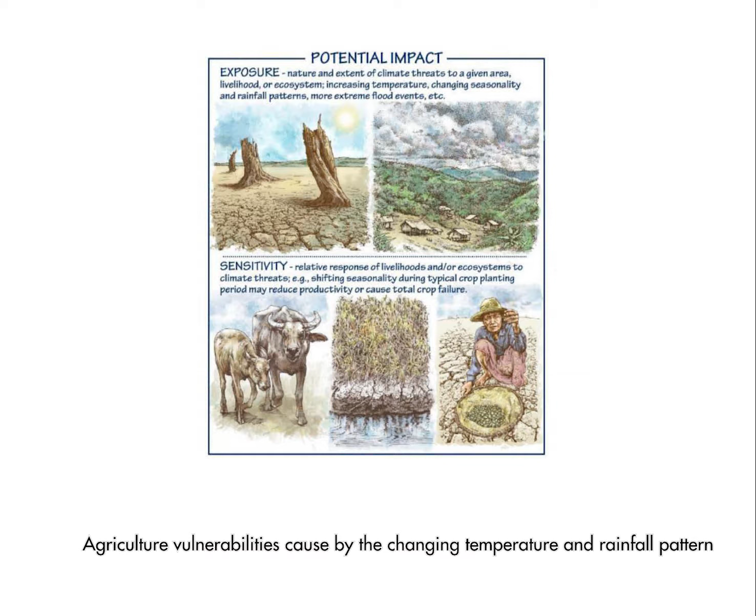Climate change has the potential to increase poverty. Agricultural vulnerabilities caused by the changing temperature and rainfall pattern are expected to play a significant role in pushing people back into poverty. In Cambodia, the monsoon rainy season runs from May to October. There is a higher risk of flooding in the 4 months from July to October.

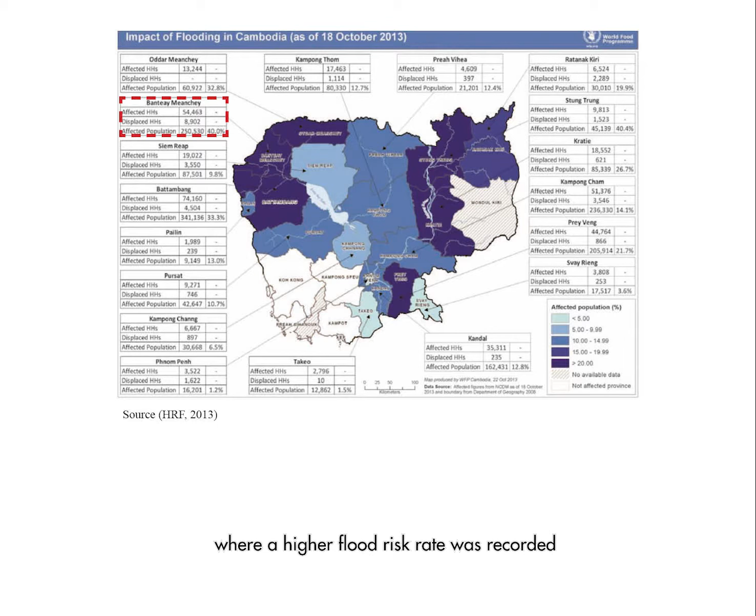Serei Saophoan is a city belonging to Banteay Meanchey province, where a higher flood risk rate was recorded. A large-scale flooding in 2013 revealed Cambodia's vulnerability to flood with a high proportion of damages. The flood map in 2013 highlights the flooded areas in the south and east of Serei Saophoan. Taking flood issues as the starting point, adaptive capacities need to be found through analysis.

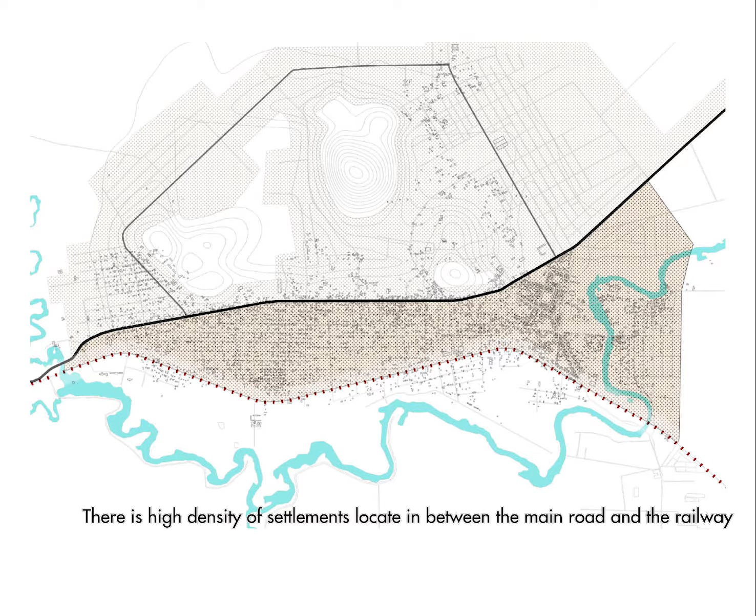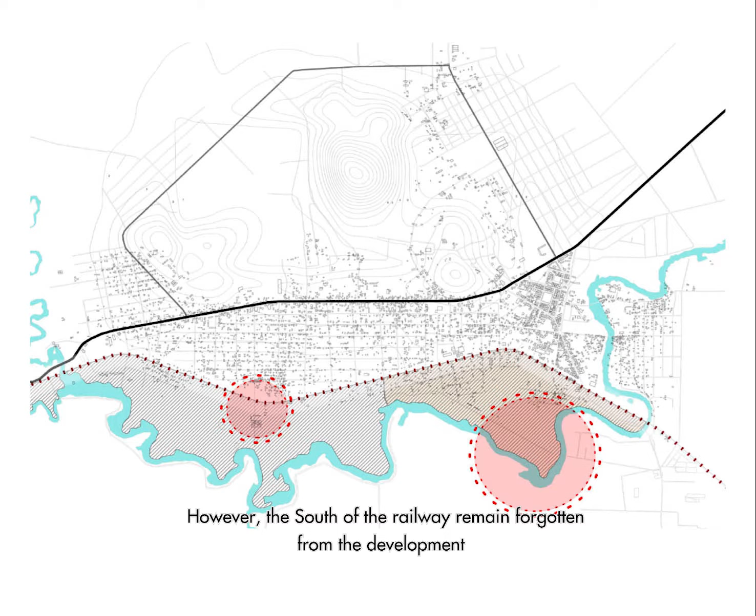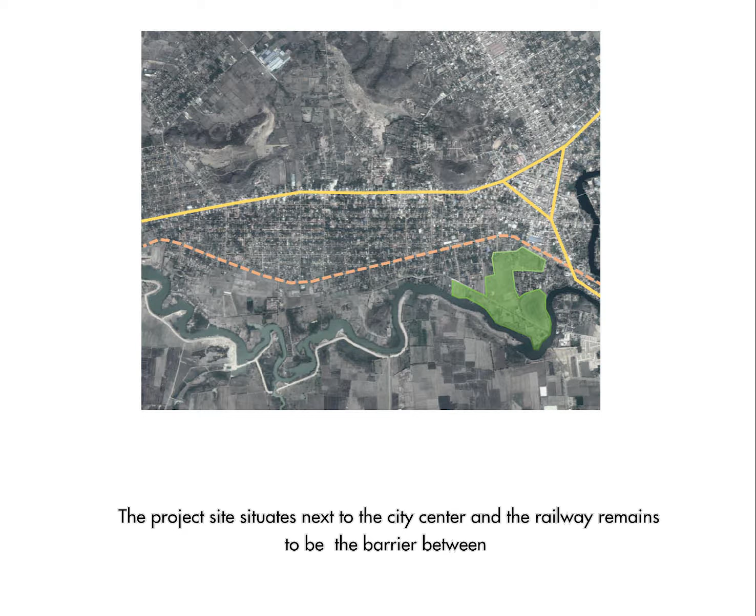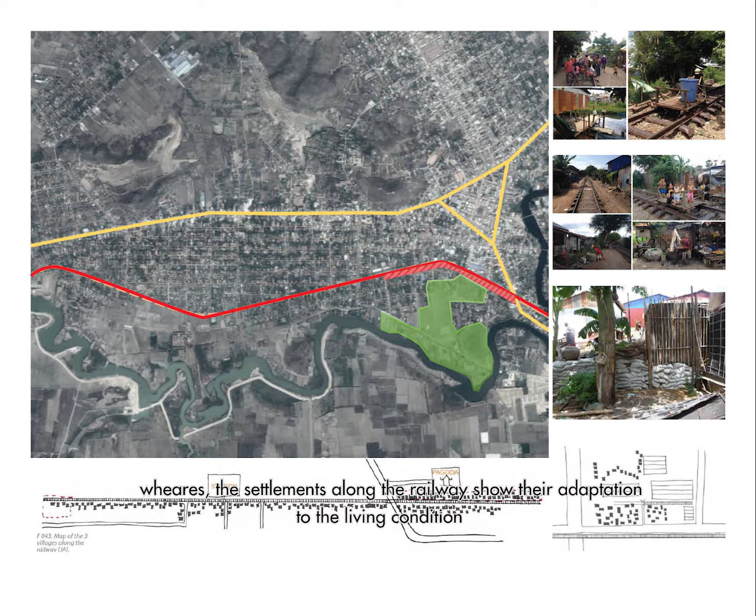In the city center, the built environment is highly appreciated, with modern materials and high-rise houses, whereas the settlements along the railway show their adaptations to the living conditions. The existing houses in the sites also show their adaptation to deal with the flood risk. Houses are built higher to deal with the water rises, and some inhabitants live right next to the existing reservoir.

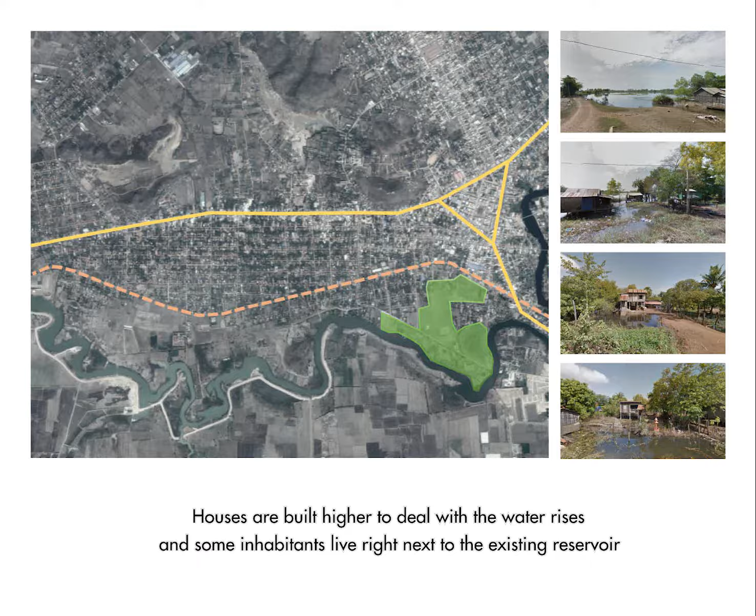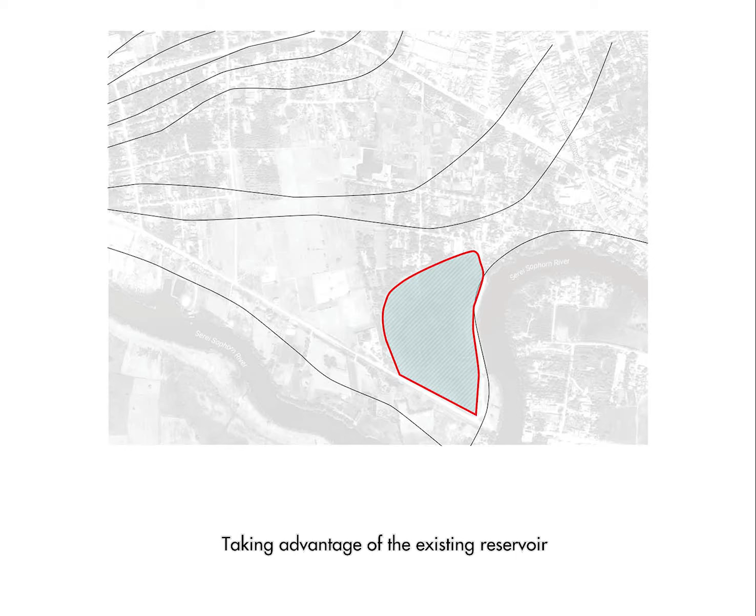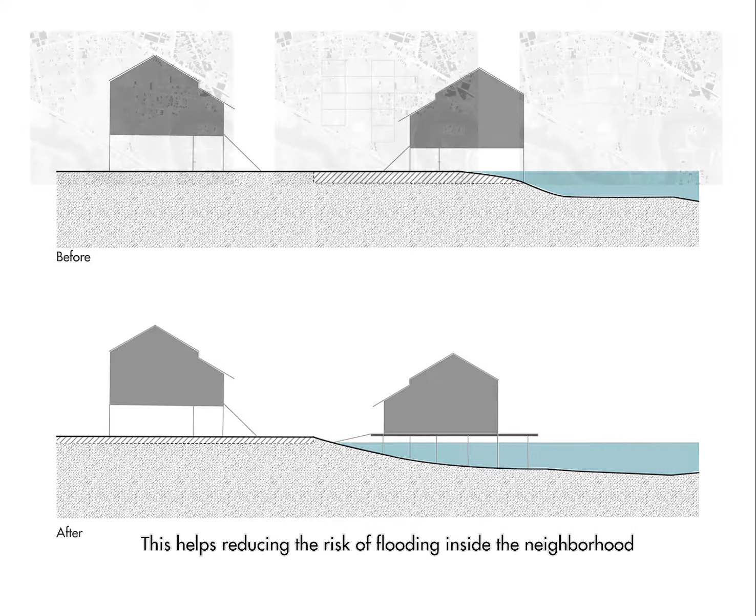A green corridor along the water is proposed in order to prevent earth erosion caused by flooding and benefit the neighborhood with fruit production. Taking advantage of the existing reservoir, a cut and fill strategy is applied to extend the water surface and level up the nearby land. This helps reduce the risk of flooding inside the neighborhoods. A new street system is proposed based on the existing paths. The goal is to connect the unfinished paths and improve local mobility, but barely disturb the existing green fabric.

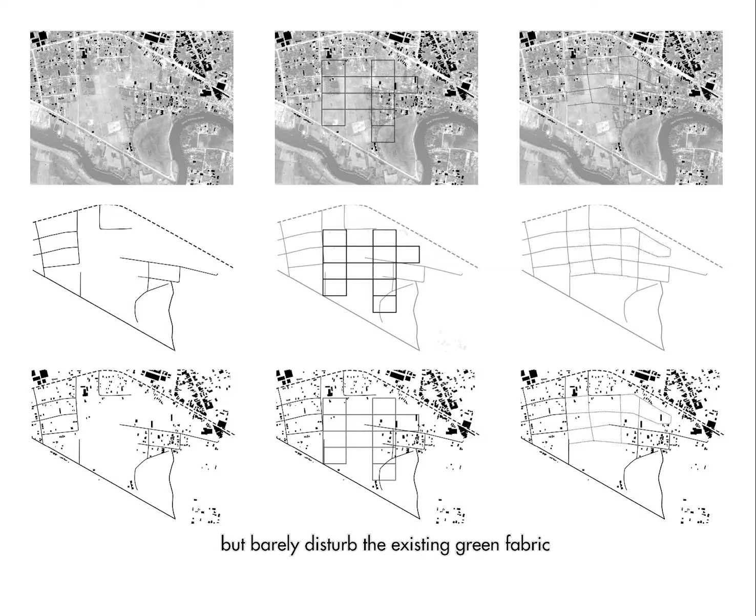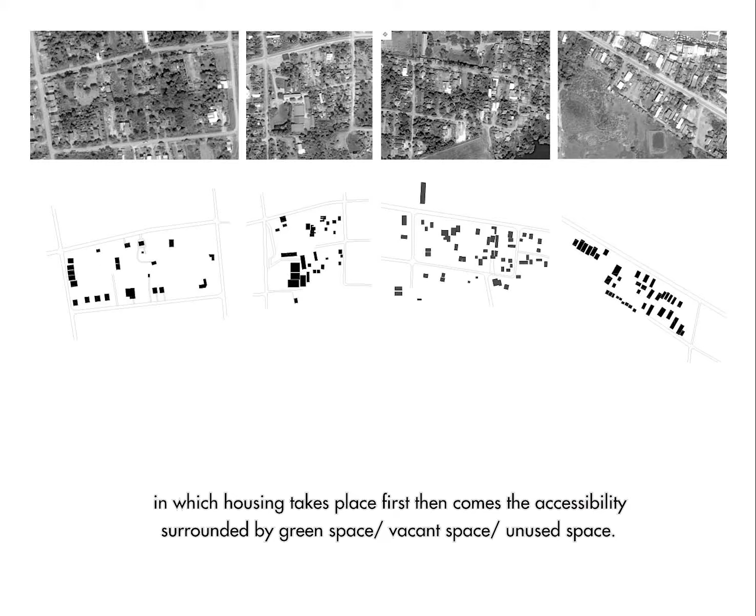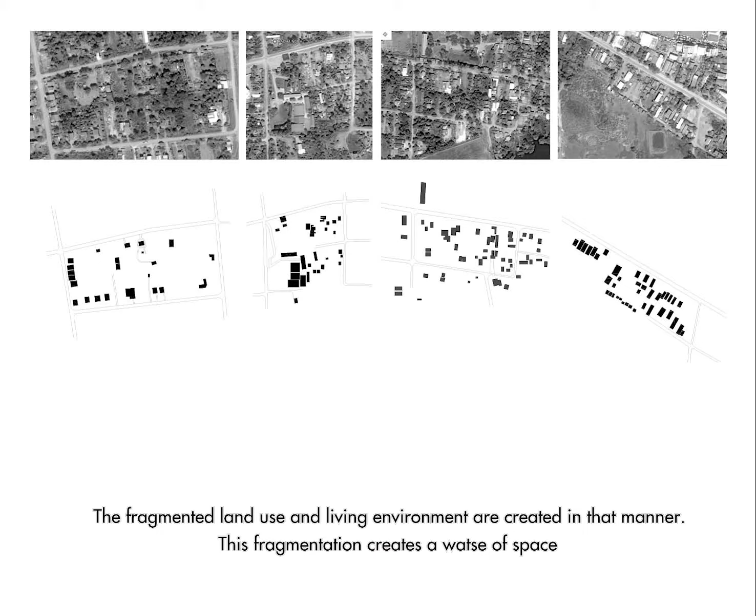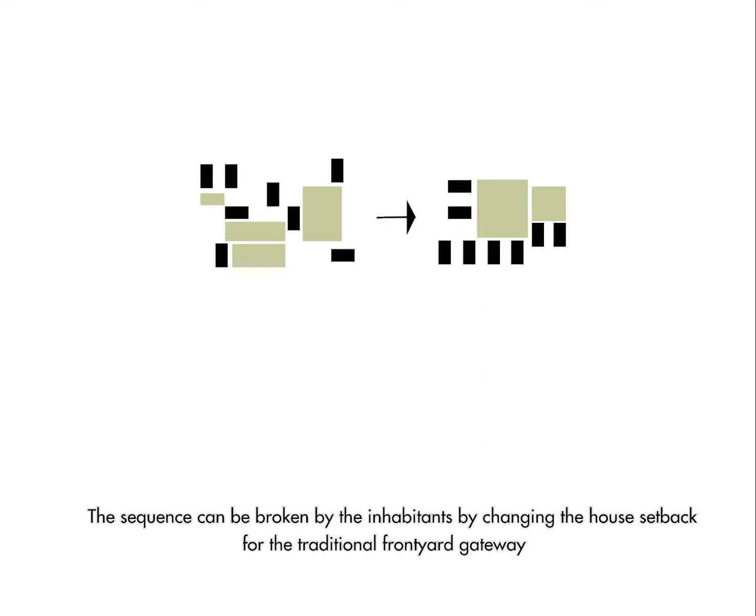Derived from the analysis is the organization of housing, in which housing takes place first, then comes the accessibility, surrounded by green space, vacant space, and unused space. The fragmented land use and living environments are created in that manner. This fragmentation creates a waste of space. The new settlement organization will create a sequence of housing aligned with the streets. The sequence can be broken by the inhabitants by changing the house setback for the traditional front yard gateway, or the orientation of the house.

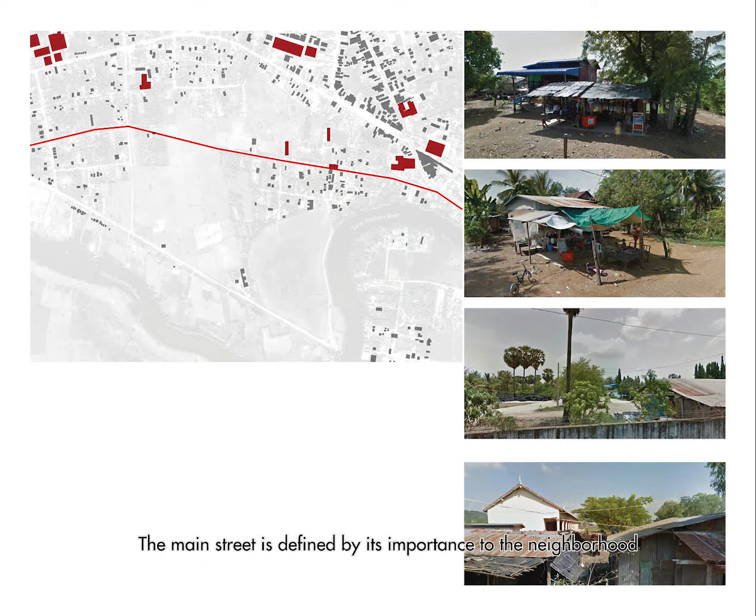The goal of the proposal is to seek a sustainable solution physically and socially. Dealing with the flooding is the starting point of the project, while creating a healthy, traditional, and beneficial living community is the backbone. The main street is defined by its importance to the neighborhoods. Many facilities are found along the streets, such as local shops, factories, and pagodas. There are two main housing typologies, along with three productive backyard landscapes: urban gardens, bamboo forests, and traditional rice fields.

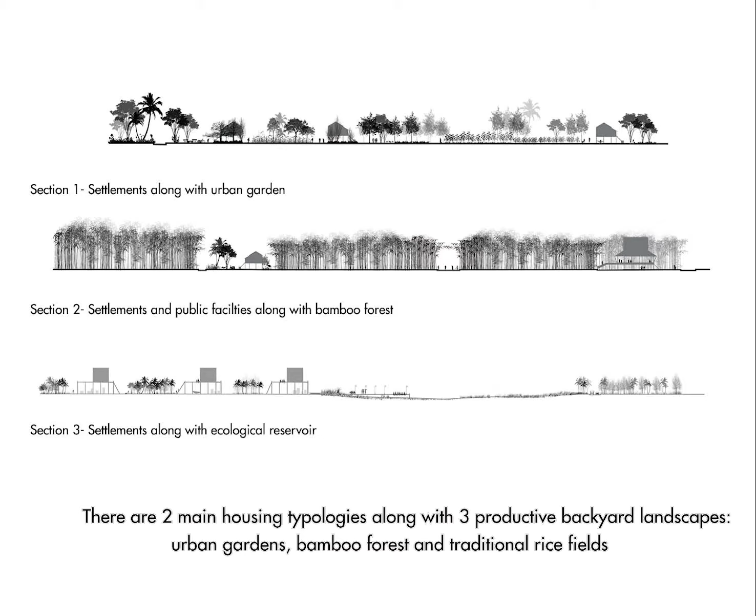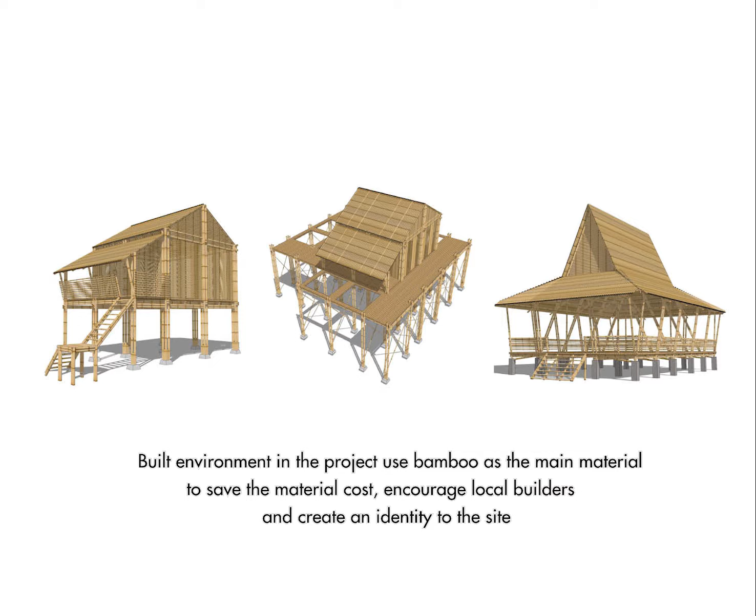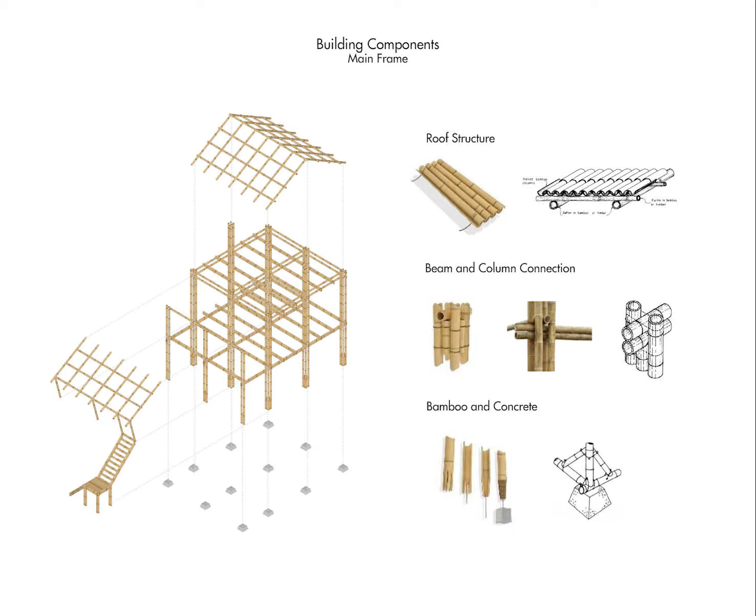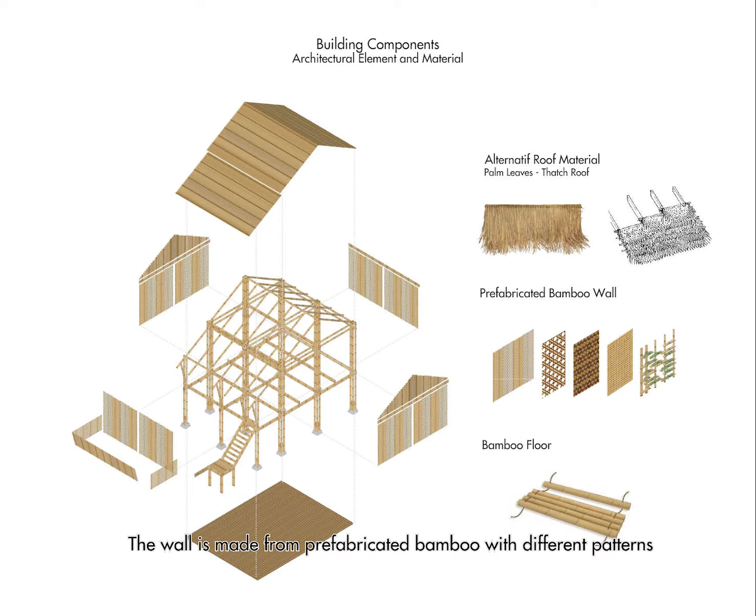The spatial layout follows the typical rural housing layout in Cambodia, with one module of grid consisting of 3 by 3 meters. Basic houses use 4 modules. Bamboo is also the material to build beams, columns, and roofs. Meanwhile, the foundation is made of concrete. Roof material can be changed to palm leaves as an alternative. The wall is made from prefabricated bamboo with different patterns. The basic house can grow organically depending on the user needs. The house is extended when the family members increase.

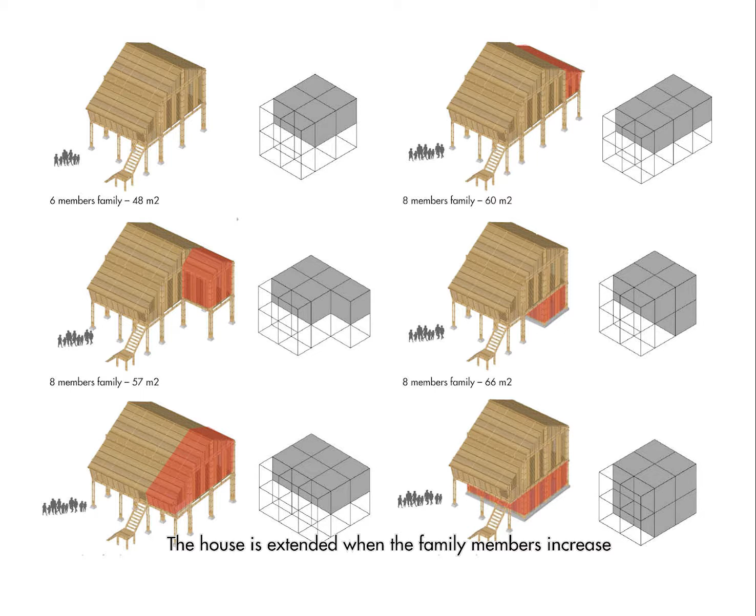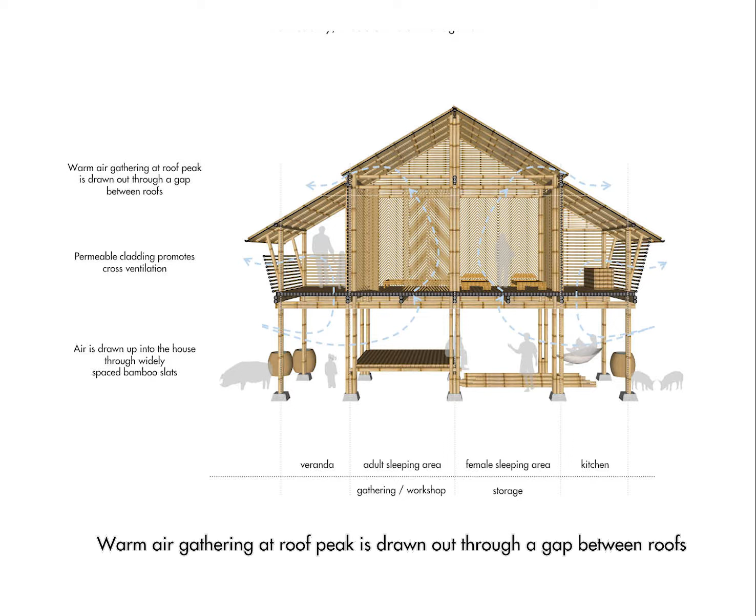To answer the need for clean and healthy community life, the housing uses a biogas digester for waste management. Air is drawn into the house through widely spaced bamboo slats. Permeable cladding promotes cross-ventilation. Warm air gathering at the roof peak is drawn out through a gap between roofs.

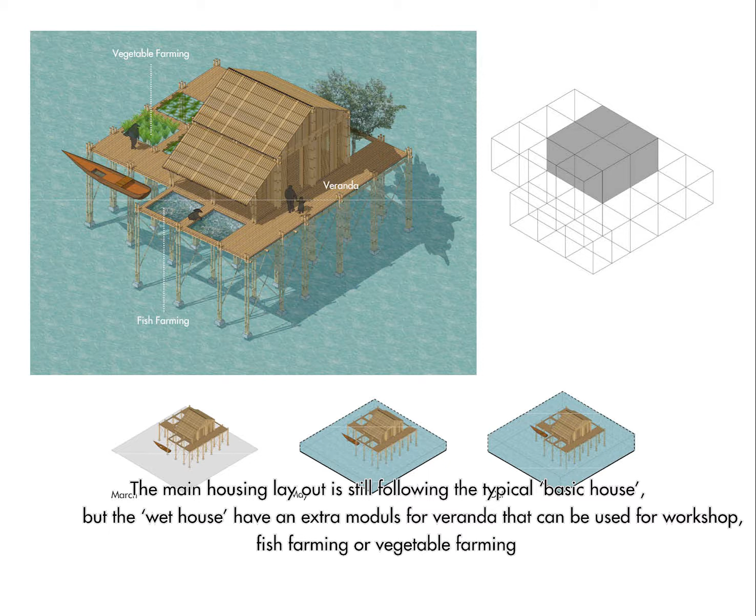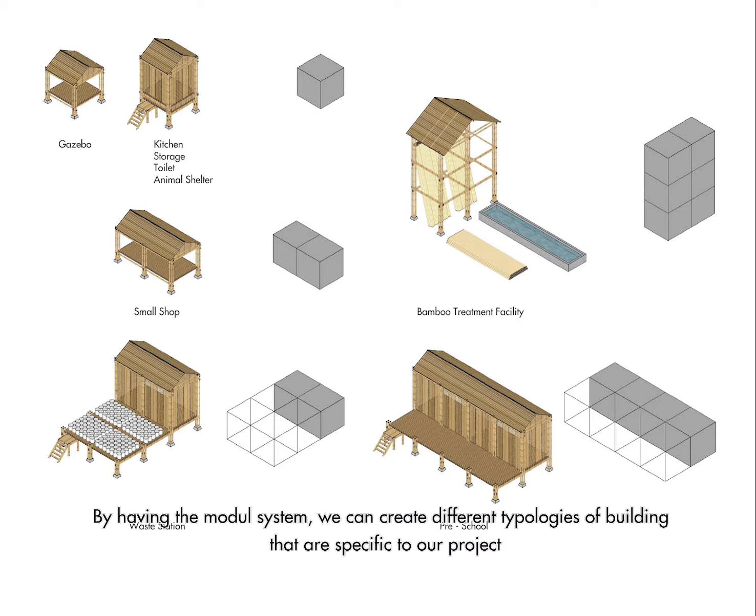The other type of housing is the wet houses that are located next to the eco-reservoir. They have longer columns for flood anticipation. The bracing structure was inspired by the housing in Tonle Sap. The main housing layout still follows the typical basic house, but the wet house has an extra module for a veranda that can be used for a workshop, fish farming, or vegetable farming. By having the module system, we can create different typologies of building that are specific to our project, from small storage to a waste station and bamboo treatment facility.

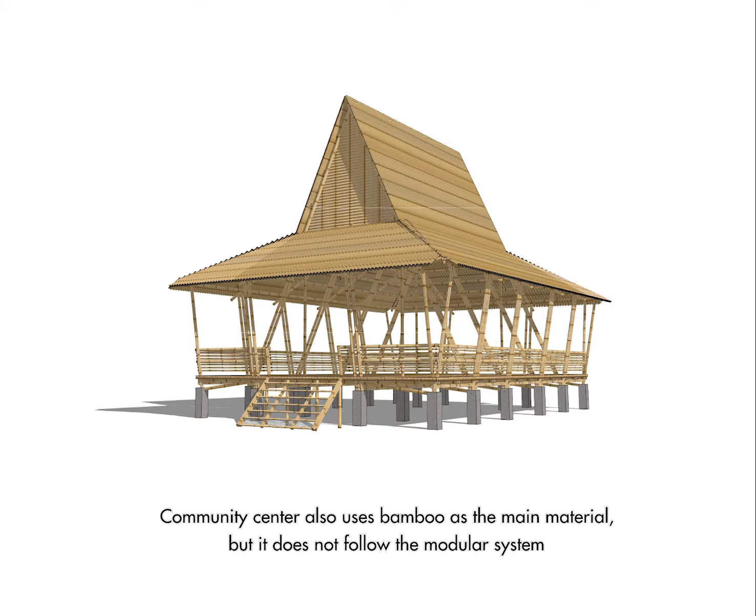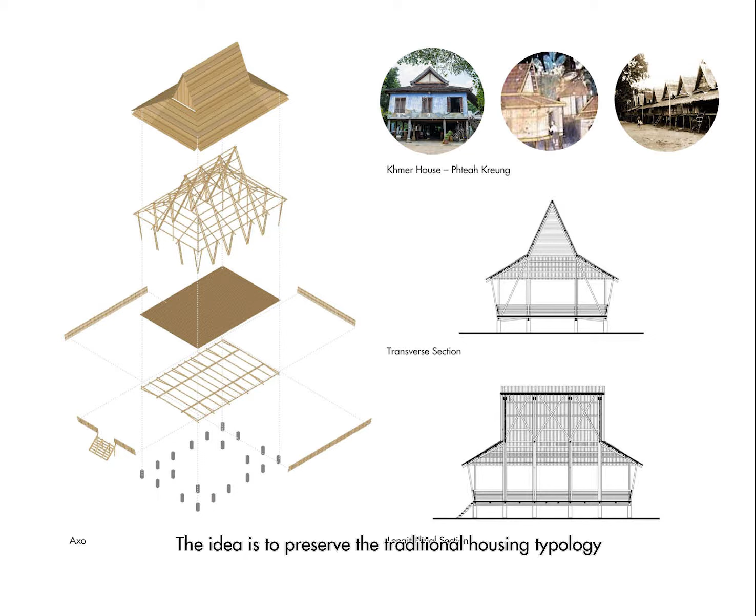The Community Center also uses bamboo as the main material, but it does not follow the modular system. The building has a more complex roof structure. The roof design is inspired by the traditional Khmer house. The idea is to preserve the traditional housing typology.